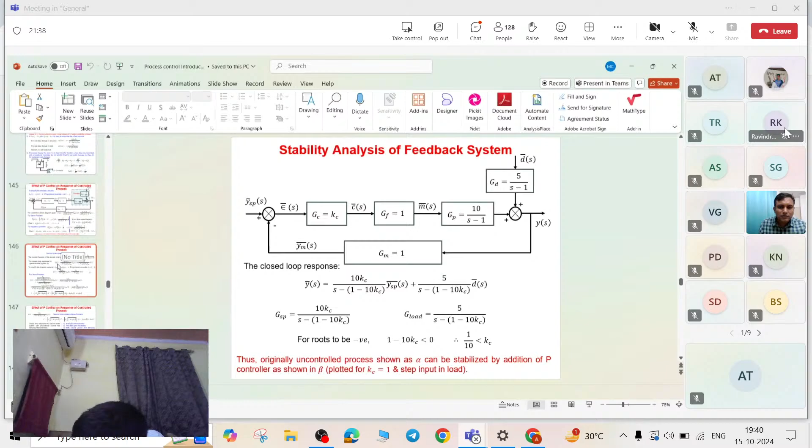Okay, so this is the slide where we have left in the last class. Remember in the last class what we started looking at? We started looking at how different controllers are going to impact, or how a feedback loop is going to impact the overall response of the process, isn't it? We might be having a first order process or a second order process, but how the response of that particular process in addition with the feedback loop is going to be. Okay, so this is what we have seen, right?

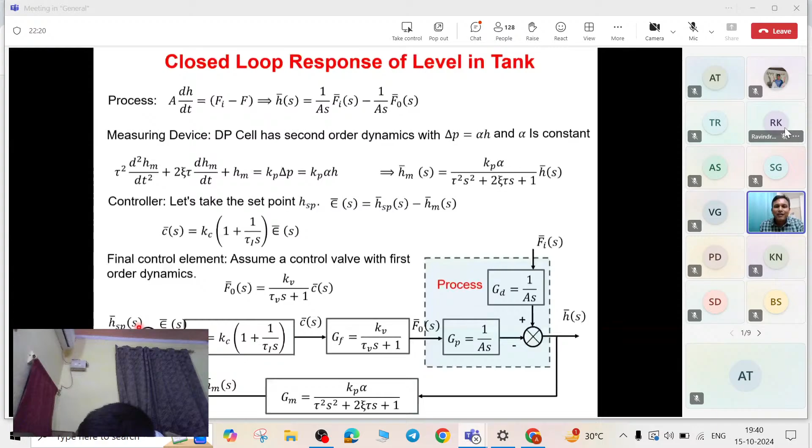A typical feedback loop is like this, isn't it? Process can be first order or second order, and depending on the controller, what will be the overall response of the process? That is what we tried to understand, and we have derived this generalized expression, isn't it?

So overall response of the process when the process is getting controlled by using a feedback loop, then if there is a change in the set point, my overall transfer function with respect to the change in the set point will be the transfer function associated with the servo problem, which will be given by all the transfer functions in the forward line divided by all the transfer functions in the loop plus 1, isn't it?

So if I'm interested in how Y dash will change if there is a change in YSP, isn't it? So YSP is the change in set point. If there is a change in set point, how my Y dash is going to change? If I am looking at this particular problem, the problem is referred as a servo problem. And in a servo problem, this is the input and this is the output.

So between output and input, how many transfer functions are there in the forward line? GC, GF, GP, isn't it? Divided by 1 plus all the transfer functions in the entire loop. So that becomes GC, GF, GP and GM. So that is what we are getting here.

So Y dash S, how the output is changing with respect to YSPS. The transfer function given here is GPS, GFS, GCS divided by 1 plus GP, GF, GC and GM, isn't it? Similarly, for a regulatory problem is a problem where I am looking at how my output is going to change when there is a change in the disturbance variable. So between the output and this input disturbance variable, what are the transfer functions in the forward line?

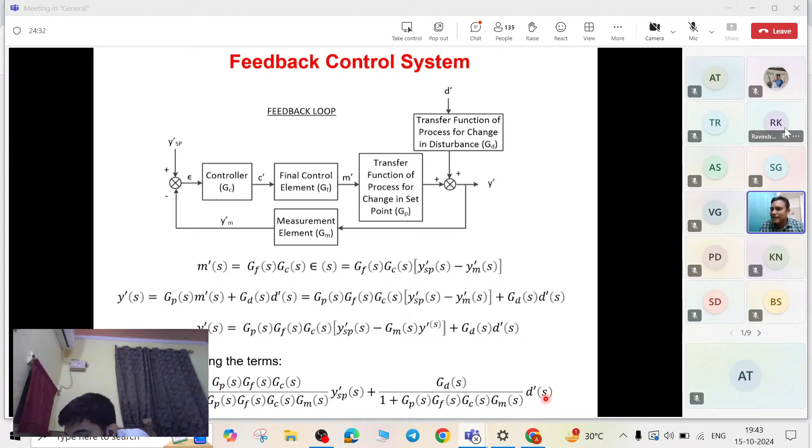So this is the generalized expression we are looking at, and this generalized expression then we have tried to understand in the context of tank system. Then also we have tried to understand the same generalized expression in the context of stirred tank heater, isn't it? Correct. And based on that, we have identified what is GD, GP, GF, GC, GM, etc.

This is what we have done in the last class before the mid-sem break. Okay, again in the last class, what we have done is if there is a process which is, let's say, a first order process, and the controller is a proportional controller, and for a time being we are neglecting the dynamics of the measurement unit and the final control element, in that case, how my response is going to be when there is a servo problem or a regulatory problem? This is what we have seen.

So what we said is whenever we are having only a proportional controller, what we get is we get a first order process itself. Our response is, if you look at this particular expression here, our response remains first order, but my system response becomes faster whenever there is a feedback loop.

That is what we have seen in the last class, isn't it? If I compare this expression with the usual first order process expression, you can see that tau p dash is a lower value than the original time constant of the process, because it is divided by 1 plus kpkc. Since kpkc is positive, tau p divided by 1 plus kpkc is lower than tau p itself. So the system response becomes faster. The process remains first order, but the speed of response increases.

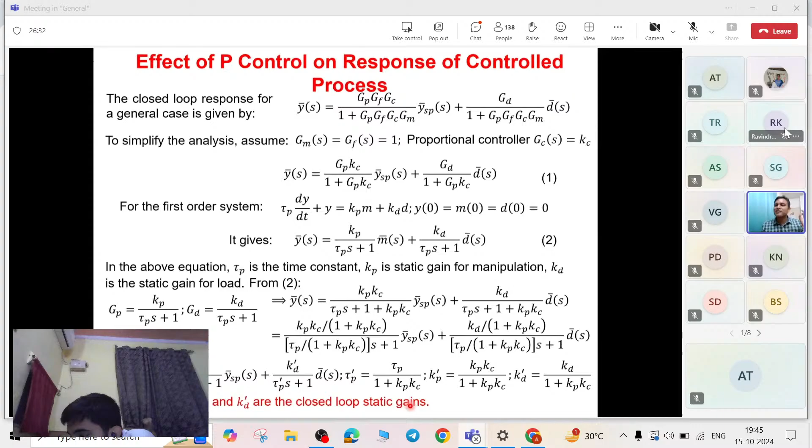Now, if you want to calculate the offset, offset is nothing but the new set point minus the ultimate response. If you calculate that, it comes out to be 1 upon 1 plus kpkc. So clearly we will have a non-zero offset whenever we are having a proportional controller. That is what we have concluded.

The same thing happens even if we are looking at a servo problem or a regulatory problem. In a servo problem we get the offset which is 1 upon 1 plus kpkc. In a regulatory problem, we get minus kd divided by 1 plus kpkc.

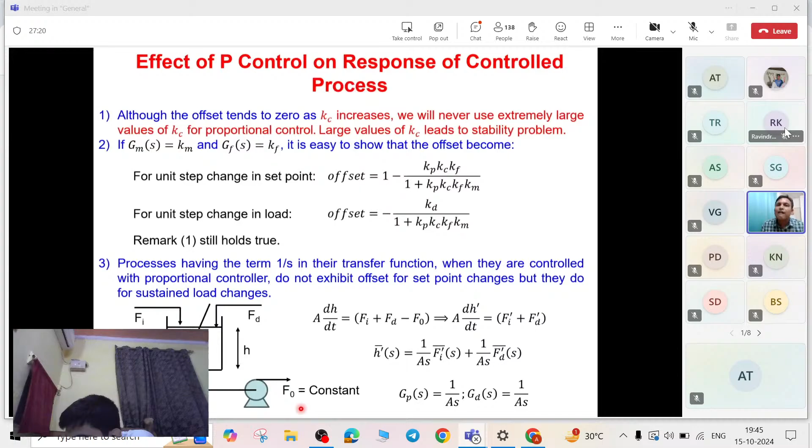Then we discussed that whenever we have a pure capacitive process, meaning a 1 by s term in the transfer function, the servo problem gives a zero offset, whereas the regulatory problem gives minus 1 by kc. This type of equation arises when controlling the level of a tank, and that's why the proportional controller is popular in level control. For a servo problem, offset equals 0, and for a regulatory problem, offset equals minus 1 by kc. With a reasonably higher value of kc, you can decrease the offset to a reasonable value.

That is why in a tank control system, typically when controlling the level in the tank, the popular controller used is a proportional controller. Up to this we have seen in the last class. So is it clear to everyone, whatever we have done in the last class?

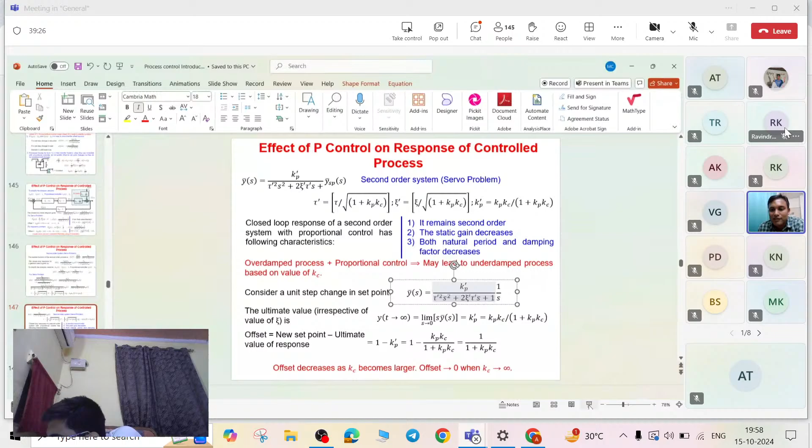All right, so now in this case, if we apply the final value theorem and calculate what will be the ultimate value of y, the ultimate value of y comes out to be Kp dash. Kp dash is nothing but Kp Kc divided by 1 plus Kp Kc.

Now I can calculate offset. Offset is nothing but the new set point minus... what was the earlier set point? YSP is what? YT is what? YSP(t) is 0, because YSP(t) is calculated in deviation form.

It is, earlier it was 0, but when you have given a step input, your set point changed by a magnitude of 1. So what will be the new set point? Just 1, isn't it, in a deviation form. So 1 minus Kp dash, which is 1 minus Kp Kc divided by 1 plus Kp Kc. So that means you are going to get 1 upon 1 plus Kp Kc. And this is not 0.

This is not 0, so what does it mean? It means that with a proportional controller, even if you are taking a first order process or a second order process or even higher order process, any order process except the pure capacitive process, it will always give you offset, and that offset is not 0. Do you all agree?

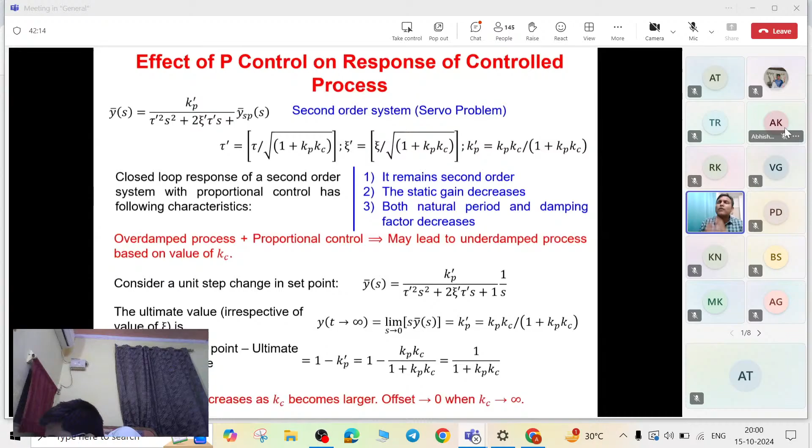Let's move from the proportional controller to an integral control action. So far we have only looked at what impact a proportional action is going to add in my feedback response, isn't it? Correct. Let's look at what impact my integral action is going to add in the process response. Okay, so that's what we are going to see. So in this case, this is the same thing.

Hello, is my slides visible? No, sir. Let me again go back to the slides. Is it visible now? No, sir. Black screen, slides are not visible. Let me just see why it's a black screen. Is it visible now? Yes, sir. Okay, all right.

Okay, so now the same thing is written here. You can see that as I increase the value of Kc, my system response actually becomes... whenever I'm looking at a first order or a second order process, and if I increase the value of Kc in a feedback loop, you can see that my process can be initially overdamped, and as I increase the value of Kc, my process becomes overdamped to underdamped. If I further increase Kc, my process becomes even more underdamped. So as the value of zeta decreases, the system response becomes faster, but that will lead to oscillations.

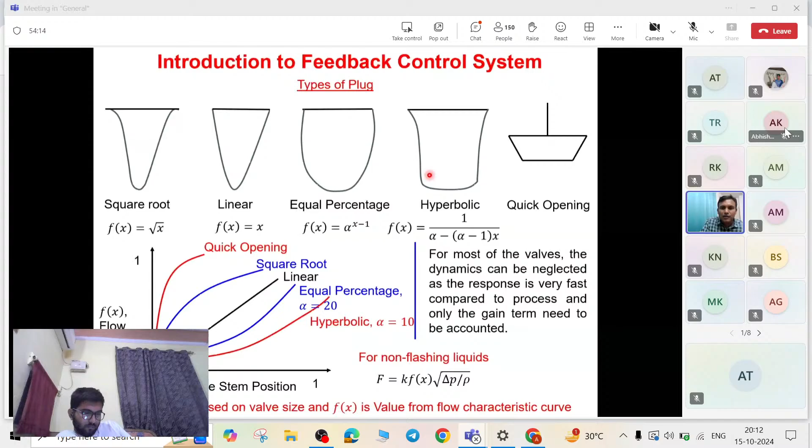I will go back, just wait. We have already seen the controllers before. So this is the PI controller. What is the transfer function for the PI controller? Kc times 1 plus 1 upon tau I s. Now, if I expand this, what am I going to get? I'm going to get Kc plus Kc divided by tau I s. Do you all agree with me? Yes sir.

Now this first term Kc is corresponding to the proportional part. So what will be the part corresponding to the integral action? It will be Kc divided by tau I s. Correct? If I expand this, I'm going to get Kc plus Kc divided by tau I s. Now the first part, which is Kc, is corresponding to the proportional part. So what will be the part corresponding to the integral part? It will be Kc divided by tau I s. Yes or no?

Yes sir. So this is the expression for the PID controller. If I expand this, what am I going to get? I'm going to get Kc plus Kc divided by tau I s plus Kc into tau D s. Those are the three parts I'm going to get: the proportional part will be just Kc, the integral part will be Kc divided by tau I s, and the derivative part will be Kc tau D s. Do you all agree with me or not?

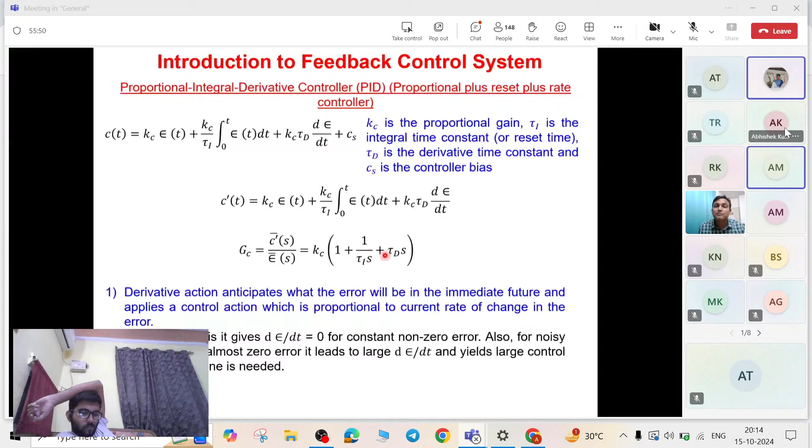Yes, sir. So the same thing we are using here. We are using the same thing here, isn't it?

Now let's look at the integral part. Here I am not using PI controller, I am only using the integral controller. Look at the term written here - it says only the integral controller, not proportional plus integral. We have only written the integral controller. So that means GC will be Kc divided by tau I s. Do you all agree with me?

Yes, sir. Correct or not? Okay, now let's do the same analysis what we have done earlier.

There is a process which is a first order process. Again, we are assuming a servo problem. Servo problem means the disturbance variable is 0, so only the set point is changing. So in this equation, D of s is 0, only YSP(s) is changing. That means only this part is there, the second part is not at all there.

So now we are going to put GP, GF, GC in this entire equation and see what type of expression we get when my process is a first order process. GP is given as Kp divided by tau P s plus 1, so that is a first order process, isn't it? So I can put this GP in this equation, and that becomes Kp divided by tau P s plus 1.

And then GC will be given by what? GC is given by Kc divided by tau I s - that is what we have obtained. And GF is just 1. Similarly, divided by 1 plus Kp Kc divided by tau P s plus 1 into tau I s. This is what I am going to get because GM is also 1, so GM and GF are 1. With that, this is the expression we are going to get.

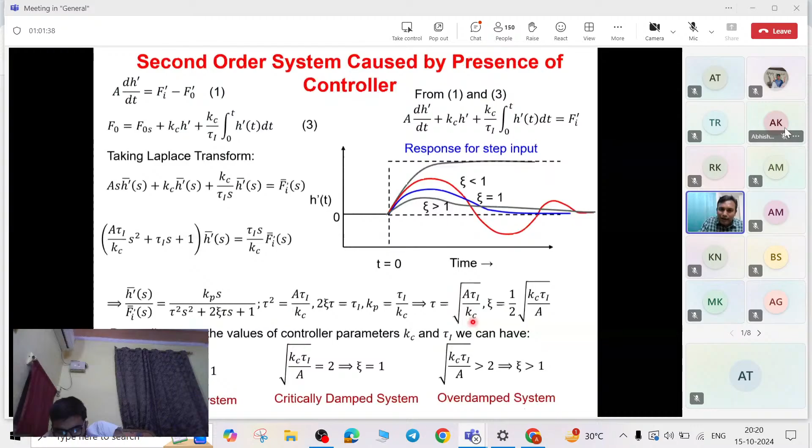So in that case, you can connect the tau with the rise time or the settling time. I'm not sure whether I have derived the expression for rise time. It's not derived here, but still I will try to give you some. It's a good question, very very good question, and I'm happy that you have asked this.

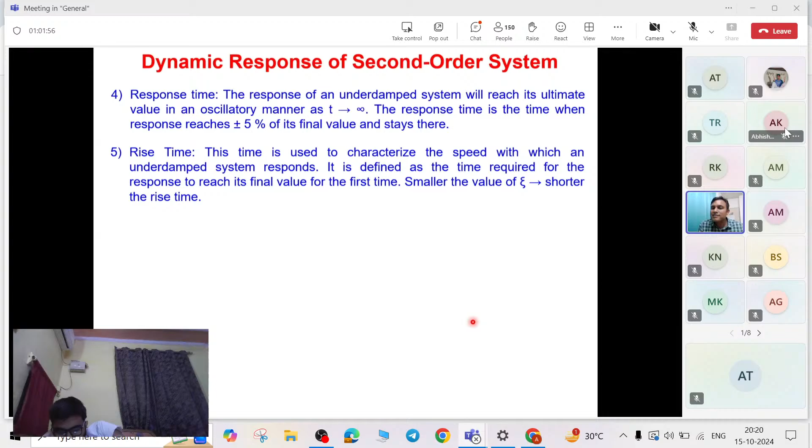What is rise time? Rise time is a time used to characterize the speed of response. But what is the rise time? Rise time is nothing but the time when you first reach the ultimate maximum value, here, isn't it? Ultimate value here.

Now, if your process is overdamped, in that case will the rise time be important, or will response time be important? Can anybody tell me? It's a really interesting question. Response time will be more important. Rise time is not important in that case.

Why will rise time not be important? Because if your process is overdamped, you may reach the ultimate response or may not reach the ultimate response, isn't it? But your response time is nothing but the time when you reach plus or minus 5% of the ultimate response. You will definitely reach this. So response time makes more sense.

Now, if you calculate the response time for an overdamped process, you get a very interesting equation. We have not derived this anywhere in the slide. In fact, that was one of the questions I gave in my exams earlier. You can all derive that. It's a really interesting question, particularly when calculating the response time for an overdamped process.

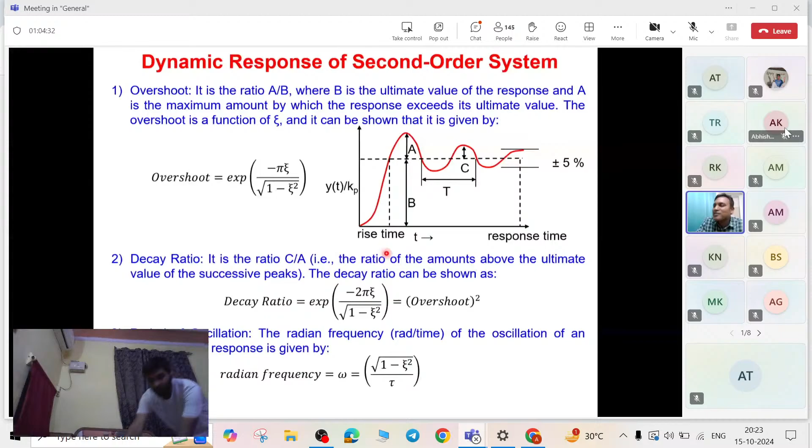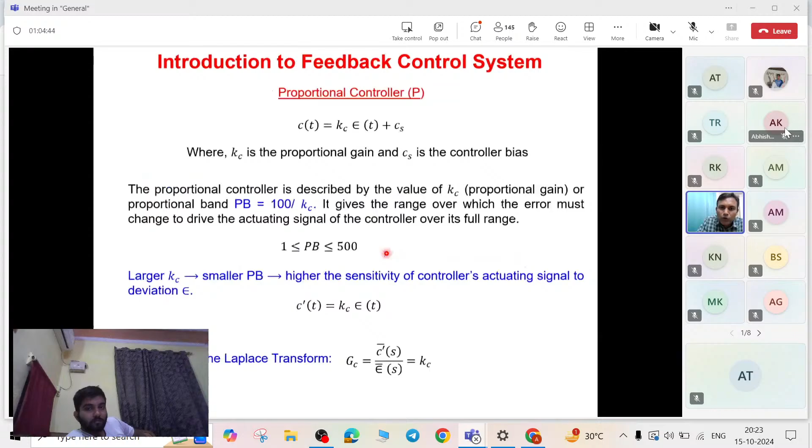Yes. Okay, so please try to derive that expression. It's a really interesting expression. I have not derived it in any of my slides, but in fact the information I am giving you was one of the questions I gave earlier. All right, please go ahead. Is there any more question?

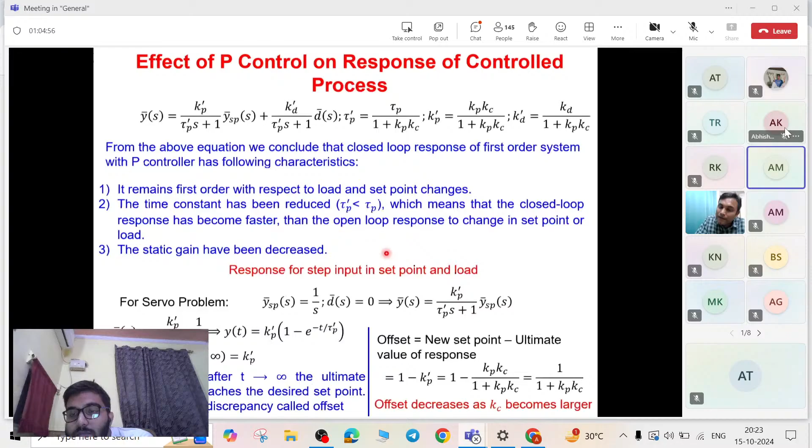Sir, when we derived the time constant for the P controller, we compared it with the time constant of the first order process. Does it really give any insight to compare the second order process time constant with the first order process?

So if you are comparing the time constant for the underdamped process, then you can directly compare, because it is kind of giving you the time elapsed between two peaks. That comparison becomes direct for an underdamped process. But for a second order overdamped process, it is somehow related to the speed of response or response time, but that effect is actually convoluted in the sense that zeta is also impacting—it's not just the time constant which is impacting there.

But when you are talking about the first order process, speed of response is only related to the time constant, not any other factor. So there, if you are comparing the impact, the direct comparison is there. Is that clear?

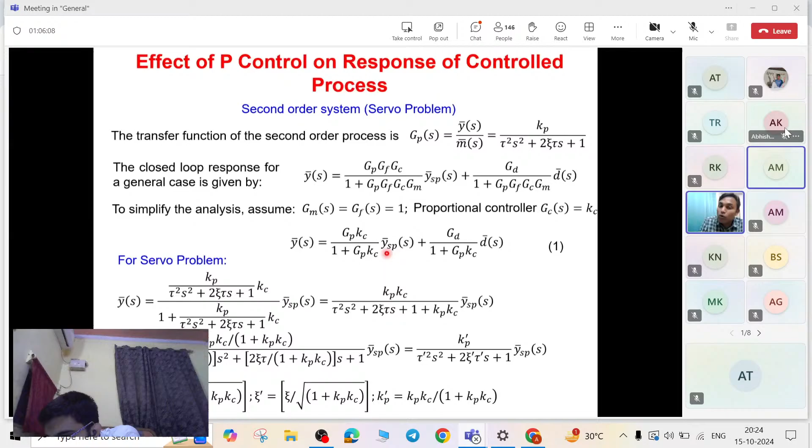But under process, the natural time period of oscillation doesn't give the speed of the process, right? The response time would be more preferable for that. Okay, so that in some way gives the speed of response. Why? I am telling you why. Just wait. So in an under-damped process,

the lower is the value of natural period of oscillation, what does it mean? The earlier peaks it will reach to, these peaks are close to each other, correct? Isn't it, sir? The time between these two peaks is lower. Even though it is not directly giving the information, but in some way it is related to the speed of response, isn't it?

Lower is the natural period of oscillation, higher the chances that you will be settling to an ultimate value faster. Yes or no? Okay, so in some way it is related to the speed of response. I am saying I don't want to say directly it's the speed of response, because there the impact of zeta is also colluded. It is not just the time constant. Both are impacting.

But direct comparison with respect to the first order process can be there. In the first order process, the speed of response is only related to the time constant. That's it. Make sense? Yes, sir. Okay, all right.

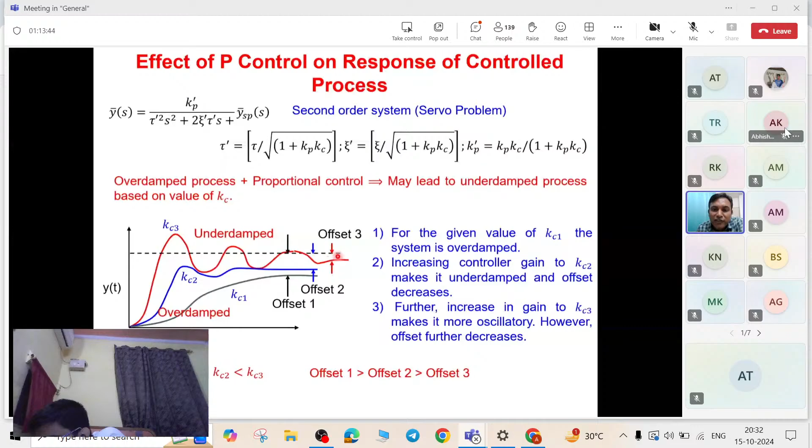Another conclusion here is as the Kc decreases or tau I increases, the response becomes sluggish and overdamped. As the value of Kc decreases, the system is becoming more and more overdamped. So if I increase the value of Kc from overdamped, it becomes underdamped. Underdamped means you will have oscillation. So that means speed of response is becoming faster, but it comes with the cost of oscillation, or a decay ratio increases, isn't it?

Again in this case, Kc and tau I are nothing but the controller parameters. So increasing the control action means what? Either you increase the Kc or decrease tau I. If you look at the expression here, increasing the control action means either you increase the Kc or decrease the tau I. Do you all agree with me or not?

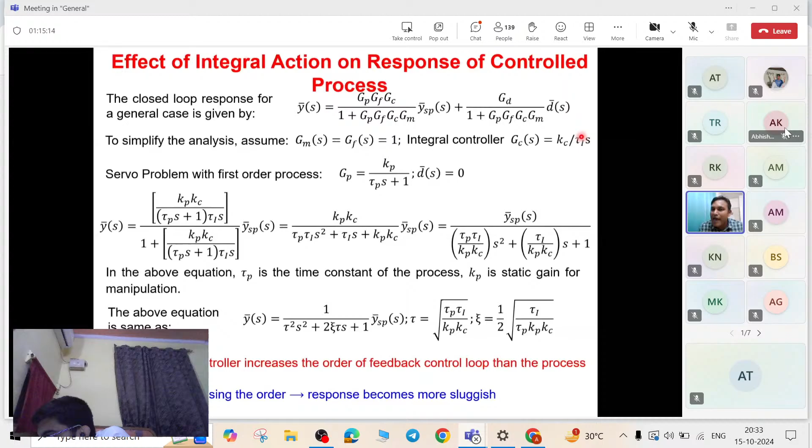Increasing the control action means what? Either I increase the Kc or decrease the tau I. So as I increase the control action, my system response becomes more and more faster, but that comes with the cost of oscillations - that is what we are trying to conclude here. The system is going to become more and more sensitive, and therefore there will be more and more oscillations as we increase the value of Kc or decrease the value of tau I. Do you all agree with me?

Hello? Yes, sir. Yes. Yes, sir.

Okay, now let's look at the impact of derivative control action. This is also interesting because each of these control actions are actually shaping the entire philosophy of using PID controller. Why proportional action should be used, why integral control action should be used, and why derivative action should be used. Of course, we have qualitatively discussed this in the starting classes. But now we are trying to derive the expression, analyze it in terms of mathematical equation, and confirm whatever qualitative discussion we had is indeed true in terms of mathematics.

It is not just vaguely described there. There is a reason why we say the proportional control action is the strength of the controller, why integral action eliminates the offset, and why derivative action makes your system response stable. There is a reason for that. It's not just qualitative description, it comes from the mathematics, from the mathematical expression. And those mathematical expressions we are trying to derive here, and we are trying to appreciate more. Is it clear to everyone why we are doing this?

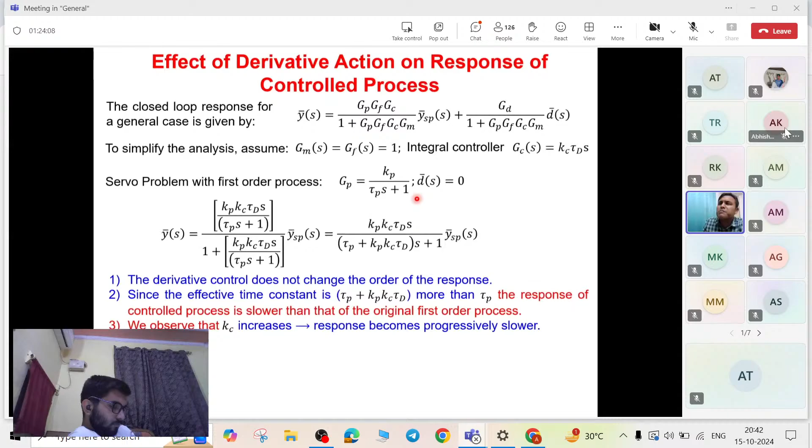Okay, now this is for a first order process. Let's extend this discussion to a second order process. Everything is the same except that the GP will be a second order process. So the same thing we are doing, just this GP becomes second order. Again, I can look at the servo problem, isn't it? So I can put this GP as the second order transfer function, and then GC will be KC tau d s, and the rest of the transfer functions are 1, isn't it?

So with that, this is the expression we are getting. We can simplify this. If I simplify this particular expression, we are going to get Kp Kc tau d s divided by tau squared s squared plus 2 zeta tau s plus Kp Kc tau d s plus 1. This is what we are going to get. Now this is really interesting, because if you look at the denominator, the time constant of the second order process - this actual process is second order, and with the derivative control, we are again getting a second order response.

The only difference here is the time constant remains the same. See, time constant tau remains the same. So what does it mean? It means that the natural period of oscillation is going to remain the same, isn't it?

Look at the zeta here. Zeta value actually increased here, isn't it? Earlier I had a zeta value equals to zeta, but with this additional term, now my zeta value will definitely be higher than the actual zeta. So that means this zeta dash will be definitely higher than the zeta. Do you all agree with me or not?

Yes. If this zeta dash is greater than zeta, what does it mean? It means that your actual process might be under damped, but with a derivative control action, it will become over damped. Is it clear? Your actual process is under damped, but with a derivative control action, it becomes over damped. So what does it mean?

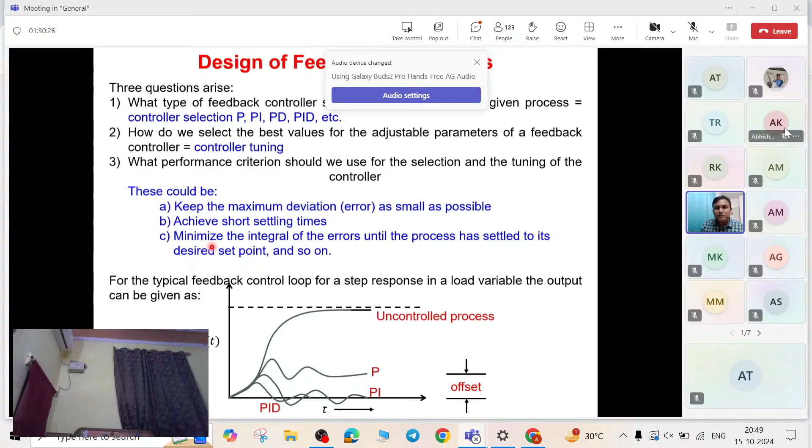Proportional control means we are going to add the external intervention proportional to the error, or proportional to how much my system is messed up. Based on that, proportional to that, I am going to apply the control action. That is something called proportional control.

We said that with the proportional control action, which is logical, but with this logical controller, I am not going to eliminate my steady state error completely. Why? Because I am applying the control action which is actually corresponding to a system which was present at a time earlier. All systems will have some error lag associated with that, so my control is not going to be perfect. So I will have steady state offset with the proportional controller.

So then we said we will apply the integral action. Integral action will keep on increasing the control action till the error is eliminated. So proportional integral action is going to eliminate the error. But proportional integral action is eliminating the error, but it will also add oscillations. And in order to eliminate the oscillation, I will need to have derivative action, and therefore the PID controller came.

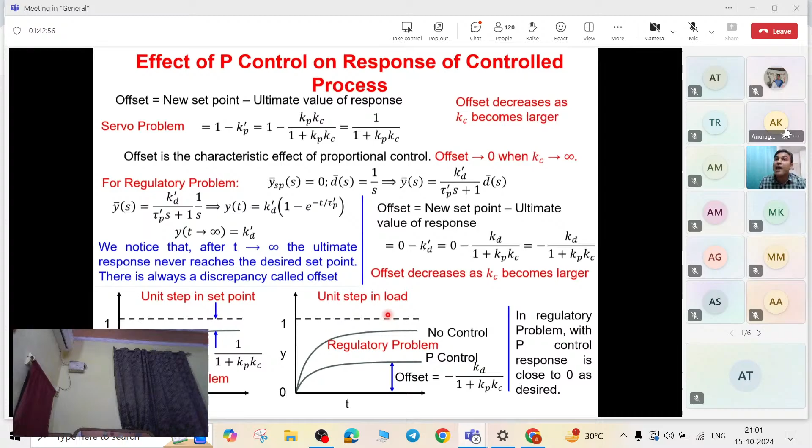Okay, so that is what is shown here. This is a regulatory problem, clearly written regulatory problem. So when I do not have control, I am reaching here, but ultimately I am aiming at reaching this 0 line.

And this difference is going to be the offset. Do you all agree? Correct, because a proportional controller never gives you a perfect output. It will have offset, and therefore it will not settle to a 0 value. It will have a steady state error. That is why this line is not settling to a 0 value.

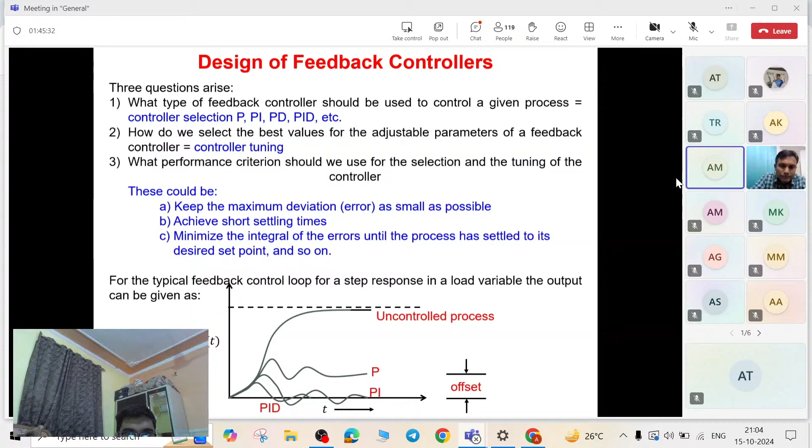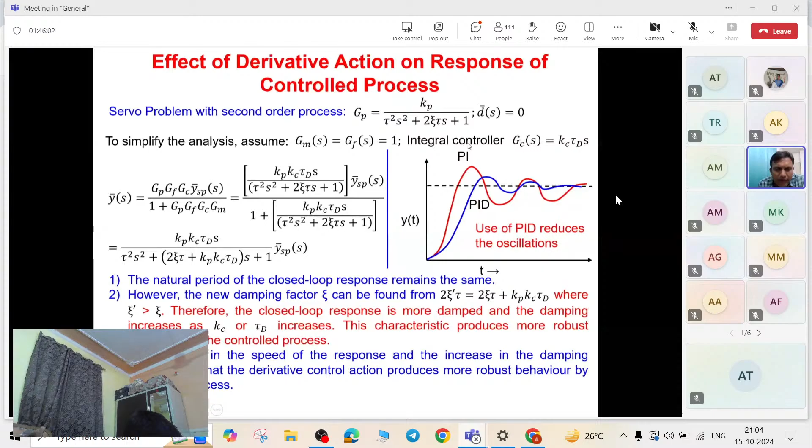Sir, why have you written here integral controller when it is a derivative controller behind GC? Please repeat the question. You have written that it is an integral controller behind the GC. Where have I written? Show me. Second line. Acha, this. Okay, sorry, this should not be, this is the mistake. Thank you for pointing it out. This is not integral controller, it's a derivative controller.